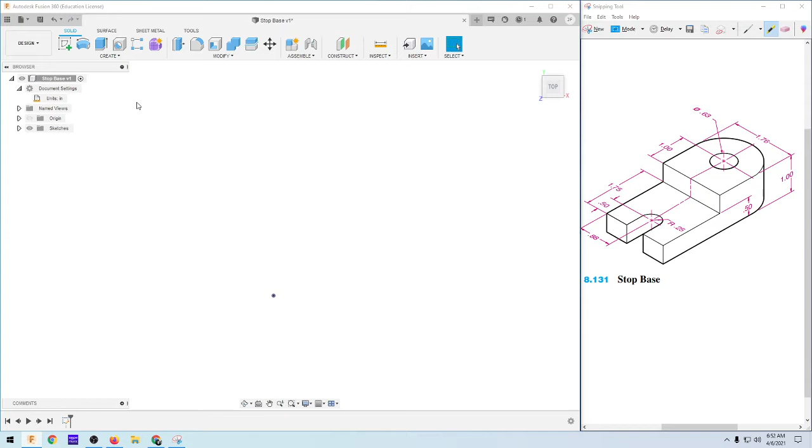First, create a sketch on the top plane. I'll create a rectangle, move it up like so, then a center point circle like so, and trim it using T for the trim hotkey.

Now I am going to dimension this out. This is going to be 1.76, and this will be 1.75 plus the 1, so 2.75. I want this to have a radius of 0.88 and to also be tangent. There you have it—it is fully defined because it is all black. I have the overall length and width, which gives this the radius, and I have my two tangent points.

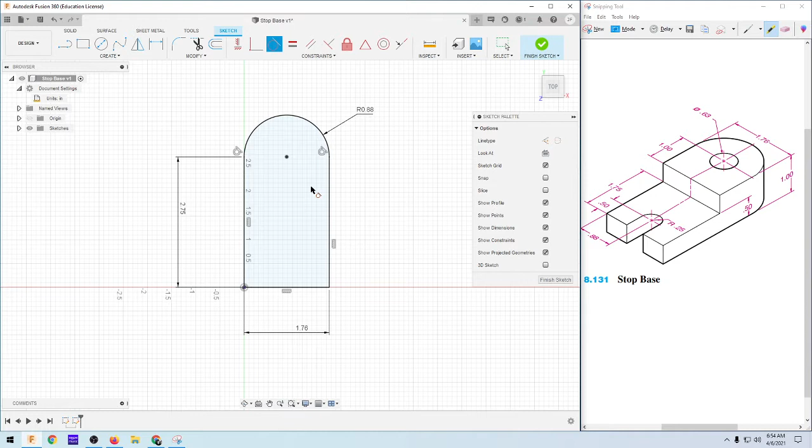So I am good, although I need to create these holes here, so it'll be kind of like one extrusion with those holes in it. Create a center circle, go into the circle in the middle there, it's snapped in. I'm going to dimension this out to 0.63.

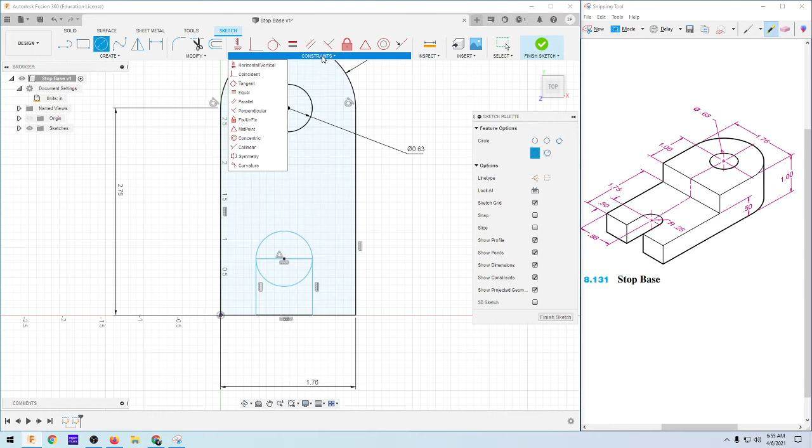Then I am going to create this channel here. I'll do a channel, and create the center point circle again. But here I am going to have to make some midpoint constraints—let's see if there's a midpoint constraint right here. The midpoint of this line and the midpoint of this line need to be moved together.

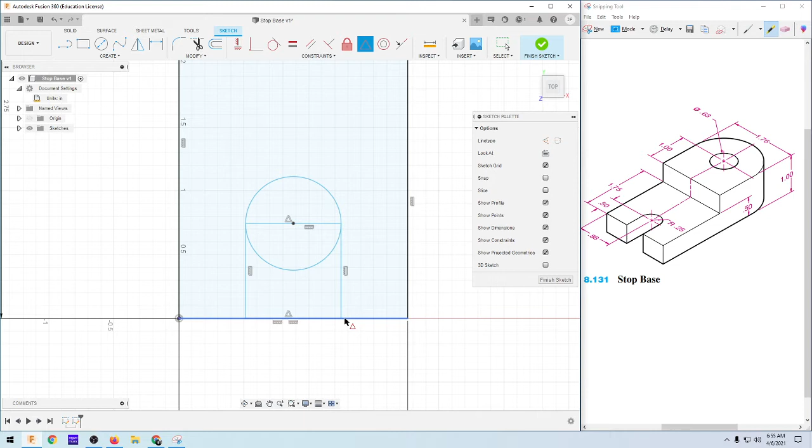Now I am just going to dimension this out. So 0.25 is my radius, but that was asking for the diameter, so I need 0.5 in there, and dimension from the center point to there—that will be 0.5.

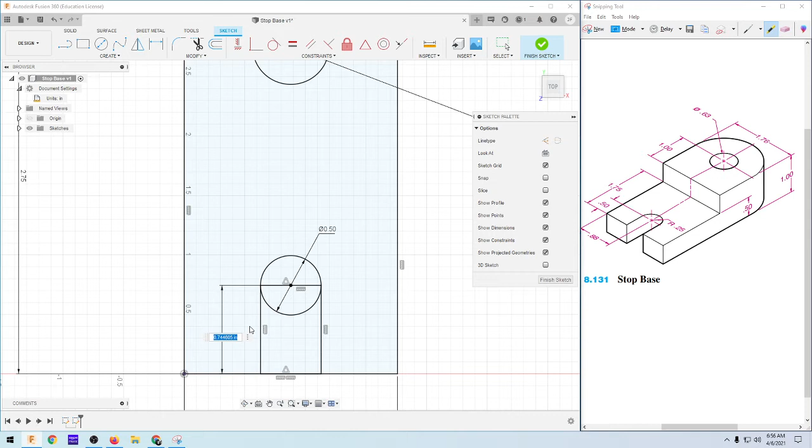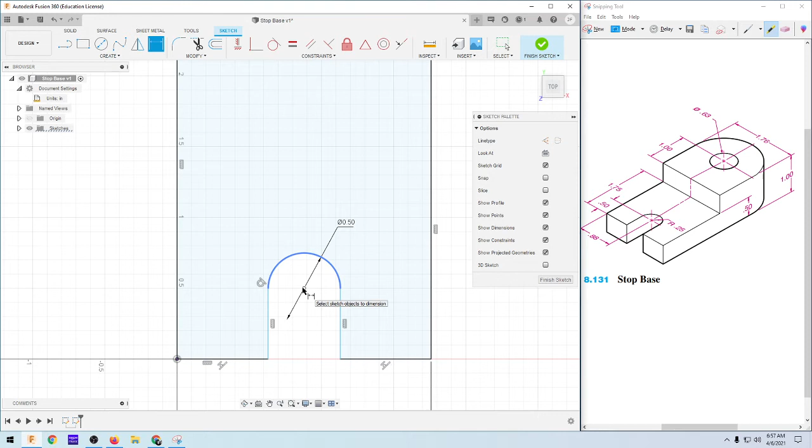Now I can trim—oh, I had constraints on that, so let's just put a tangent constraint on there, and now we're good. I'm going to cut this out too, but that might delete a constraint—that's okay, I can add it back in after. So I'll delete those two, and now add in that constraint: from the center to there is 0.88, and this here is going to be 0.5.

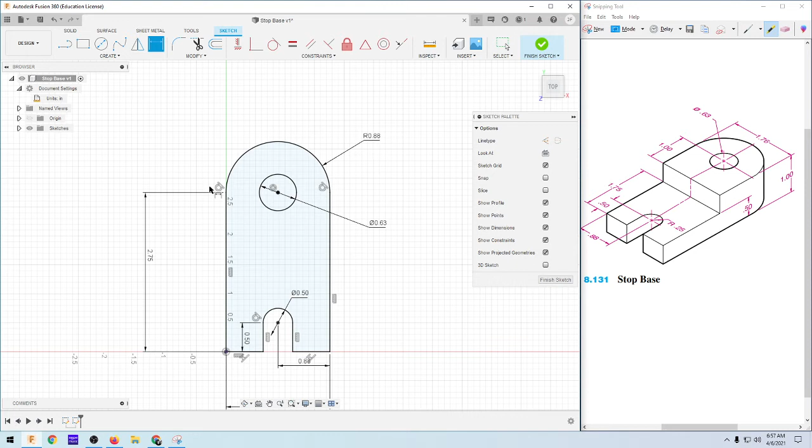All right, so now we have our overall shape. Once we extrude this, all we have to do is cut out that channel, which is 1/2 inch. So what I'm going to do now is pull this out.

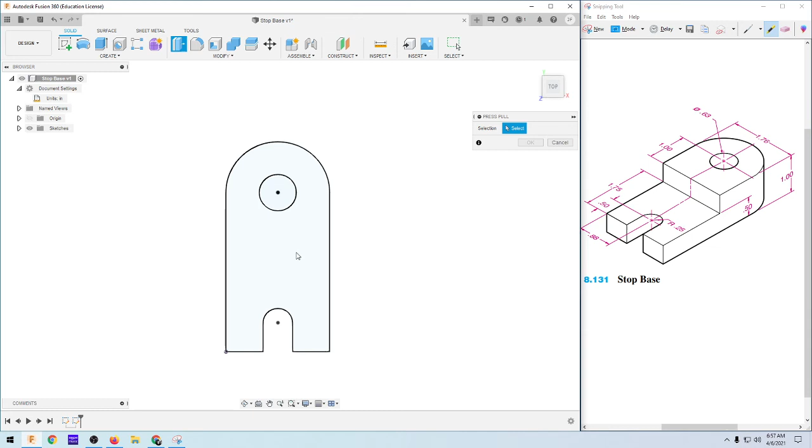There's a cool tool here—instead of going to create and extrude, you can right click on the canvas, the white space, and go to push pull. That automatically brings you into this 3D space. Now you can click on this and it's going to extrude or extrude cut. I'll put in the extrusion here, 1 inch, press enter, and I have my block. That's a nice little tool to quicken your speed in 3D modeling.

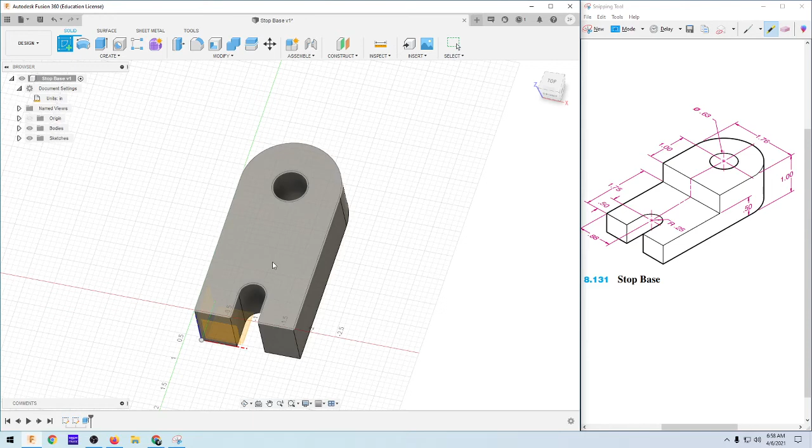The next thing I'm going to do is apply this cut here. Again, I'm going to create a sketch—I can do that on the side or on the top, I'll just keep it on top since I've been working there. Create sketch on top of my part, and now I'm going to create a corner rectangle from this corner up to about there, and dimension that to 1.75.

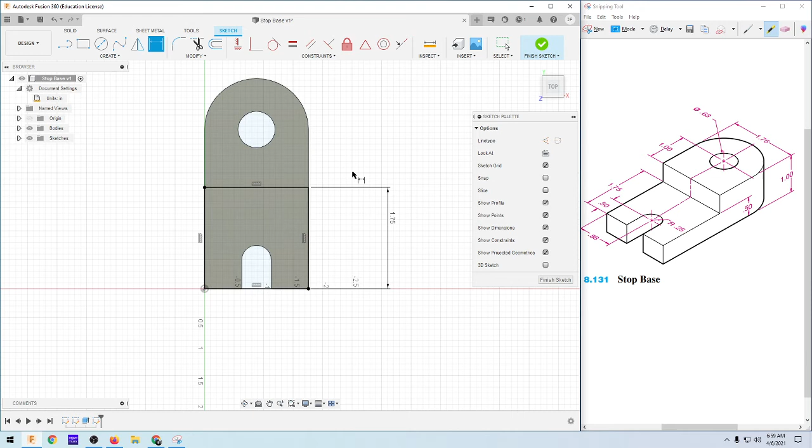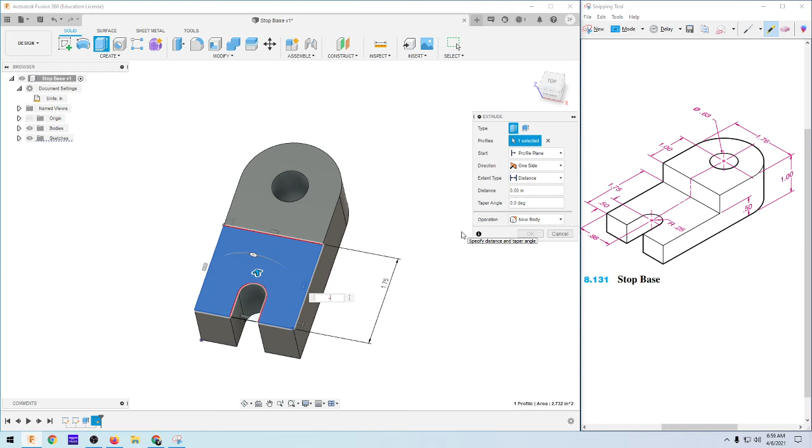Now I can do that push pull. If you hold down the right mouse button and draw in the direction, it automatically brings that—it's an even quicker shortcut. So I'm just going to click here, and I don't want to go in that direction—I'm going in the negative direction. Positive direction is upwards, so I'm going to put in negative 0.5.

And that's it. So that's your stop base. There are no fillets or chamfers, so the edges look like they're all intact.

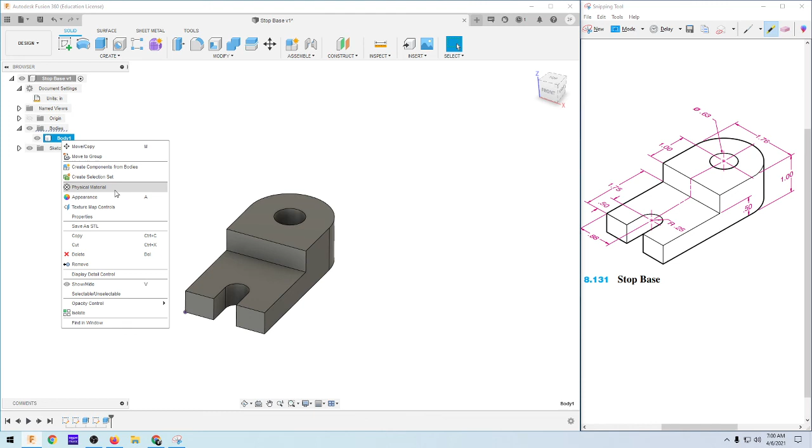The last thing I'm going to have you do is apply some material to this. I'm just going to go into bodies, right click here, physical material, and we are going to make this stainless steel, the generic one up here. Just click and drag that out there, and it applies that material.

Now you can do tests on it, simulations and stress tests and whatever you want to do, and it will act as if it is stainless steel. What we're going to do is just get the properties off of it—right there, properties: 18.639 ounce mass. So what is that? A little over a pound, right? 16 ounces in a pound, so a pound and 2.639 ounces.